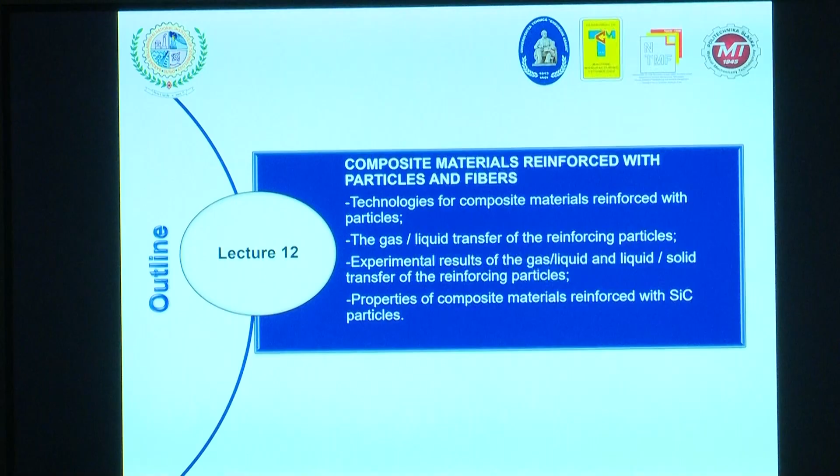Reinforced with particle and fibers. I put also fibers over there to compare some properties, but the experimental results that I will present will be focused only on particles. So we'll see some

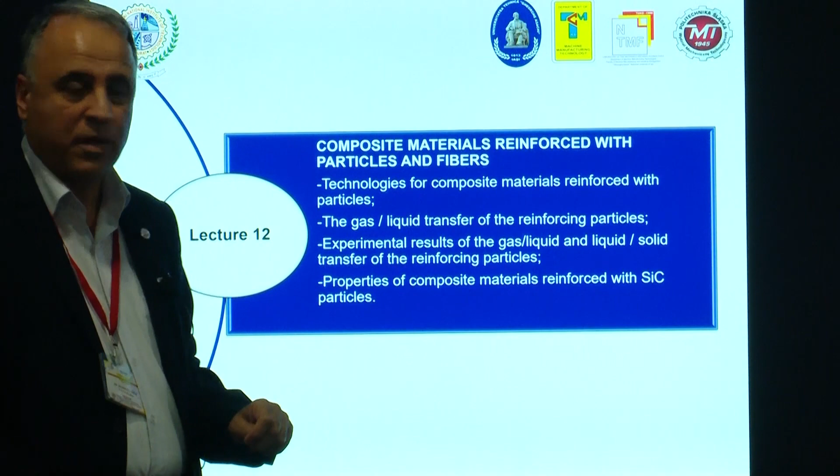technologies for composite material reinforced with particle, some theory concerning the gas to liquid transfer of the reinforcing particle, experimental results concerning the gas to liquid and liquid to solid transfer of the reinforcing particle, and property of the composite material reinforced with silicon carbide particles.

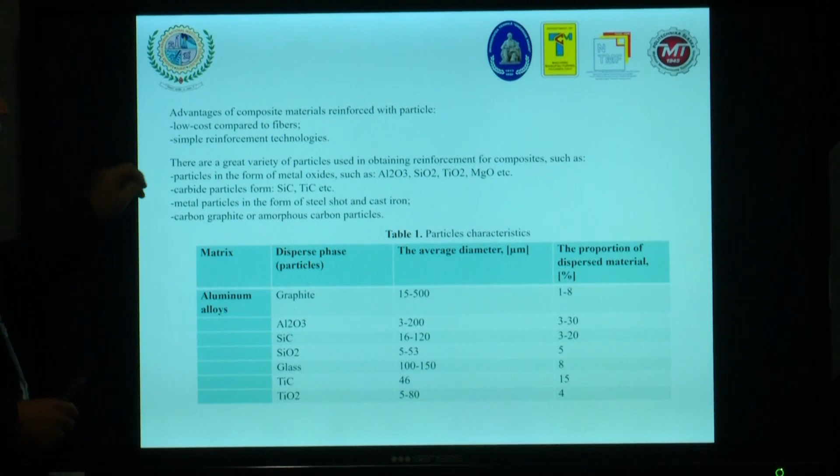So let's see a little bit only two advantages of composite material reinforced with particles: low cost compared with fibers, and simple reinforcement technologies. Kalpak asked me 2 days ago if there is a possibility, when I talk about some particles inside of the polymeric, to mix the particles.

You will see later that we got together - doesn't matter if I'm the first author - a patent in Romania for this type of equipment, in order to mix the particle inside. But the base method, as you already know, is the vortex method.

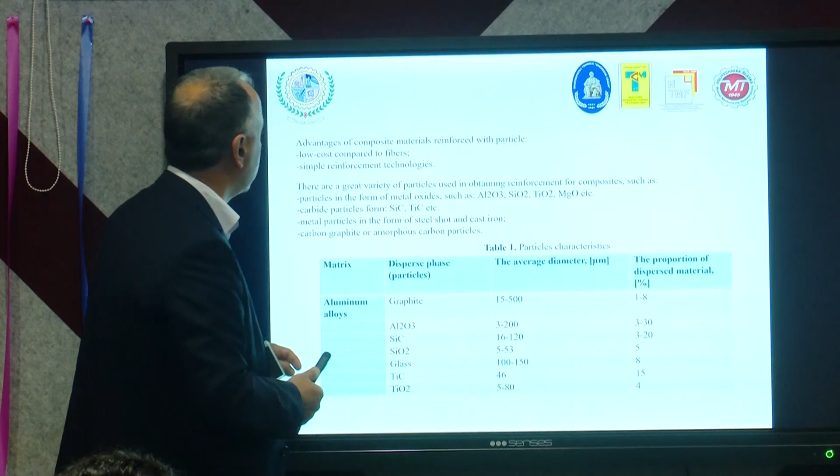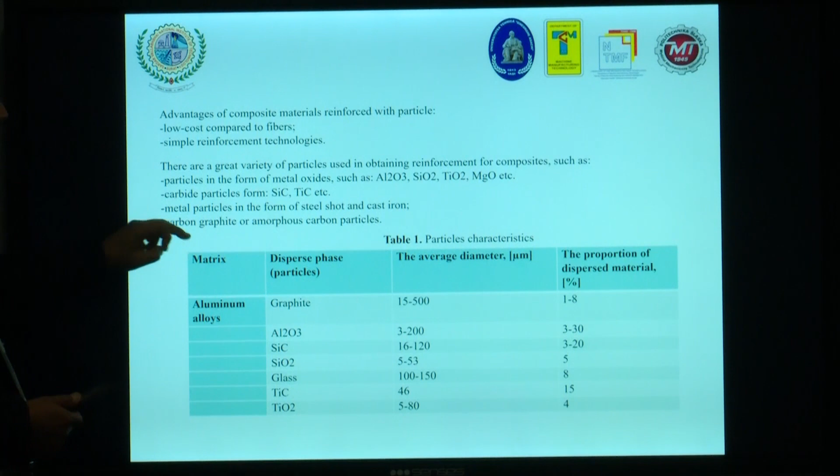So there is a great variety of particles used in obtaining the reinforcement of composite, such as particle in form of metal oxide. You can see aluminum oxide, silicon oxide, titanium oxide, magnesium oxide, and so on. Carbide particles from silicon carbide, titanium carbide, metal particles in form of steel shot and cast iron, carbon graphite or amorphous carbon particles.

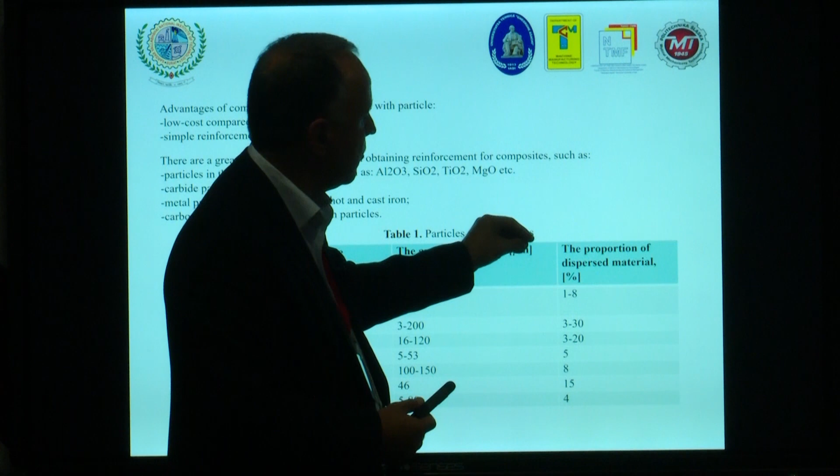I put over there, in case of aluminum alloys as matrix used, which are the particles, which are the average diameters, and which is the proportion of the dispersed material - how many percent of the material is dispersed.

So you can see the highest on graphite, but take into account the proportion of dispersed material, around aluminum oxide - one of the most used particles for reinforcement.

A little bit of comment: in case of particle reinforced composite material, the mechanical property change is less than in case of fiber reinforcement. We already know this, it was mentioned many times during this week. So the mechanical properties will decrease. These materials have significantly improved tribological properties, resistance to wear and shock amortization increases.

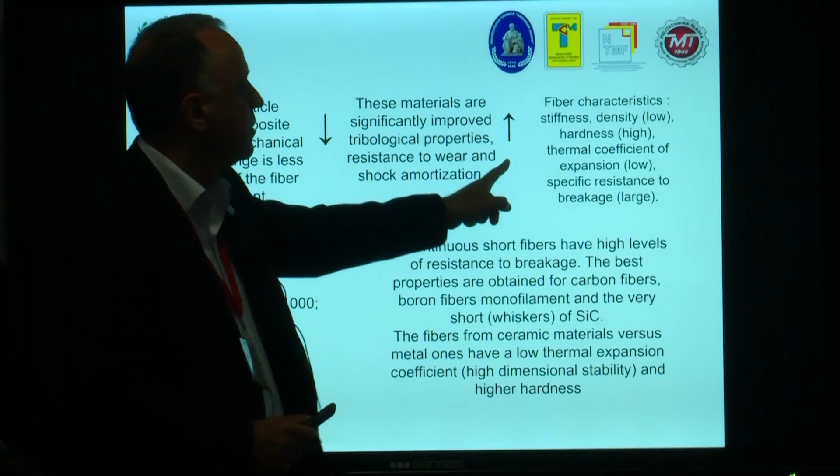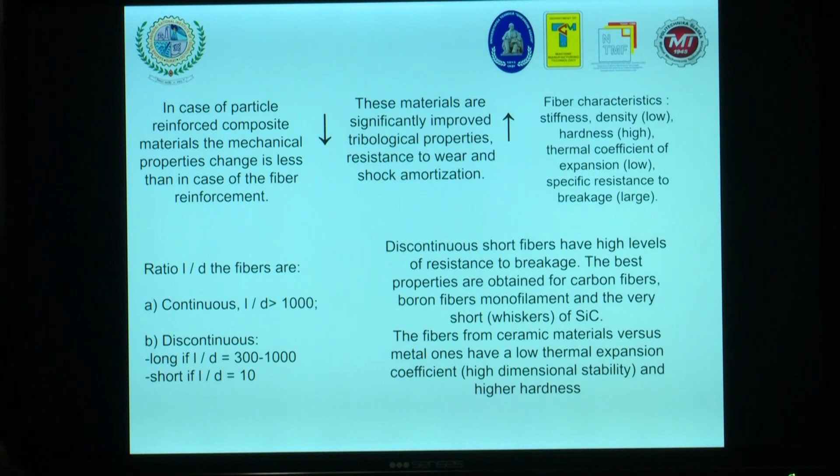Concerning the fiber characteristics, we can talk about the stiffness, density, hardness, thermal coefficient of expansion, specific resistance to breakage, and so on. The fiber has the main role in order to make a general classification - I mean the ratio between the length and diameter.

If this ratio is bigger than 1000, we can call it continuous fiber. In case that the ratio is between 300 and 1000, we can call it long discontinuous fiber. And if the ratio between length and diameter is 10, we can call it short discontinuous fiber.

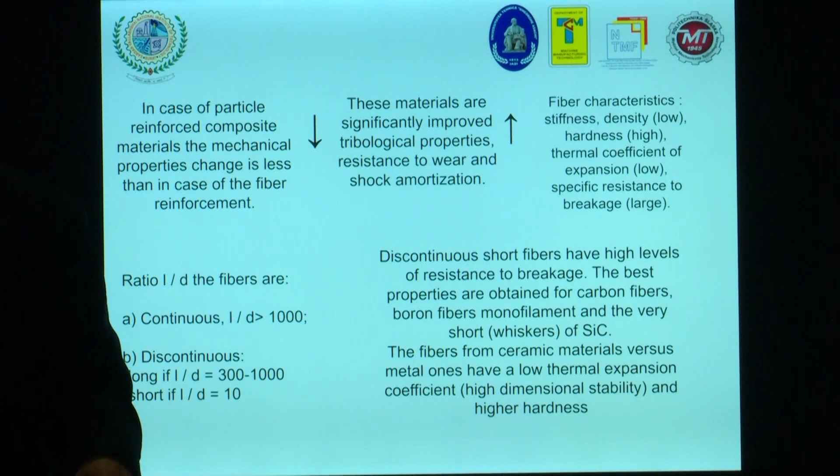Discontinuous short fiber have high levels of resistance to breakage. The best properties are obtained for carbon fibers - many times during the lectures this week we talked about carbon fibers - boron fibers, monofilament, and the very short whiskers of silicon carbide.

Fibers from ceramic material versus metal ones have a low thermal expansion coefficient, meaning high dimensional stability, and higher hardness - but of course, because we are talking about ceramic.

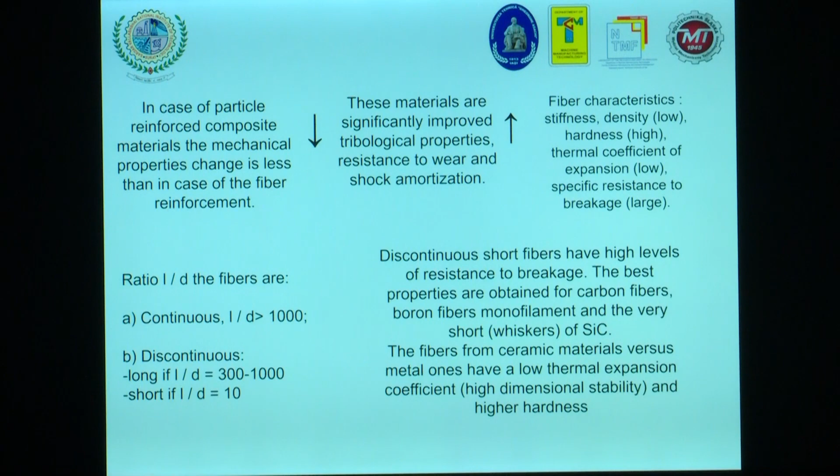So why do we use fiber reinforcement with a thin diameter? As the diameter decreases, the inherent flaws in the material also decrease and the strength increases, for better load transfer from matrix to fiber - because as you remember at the very beginning, when I mentioned which are the main goals of the matrix and which are the main goals of the fiber.

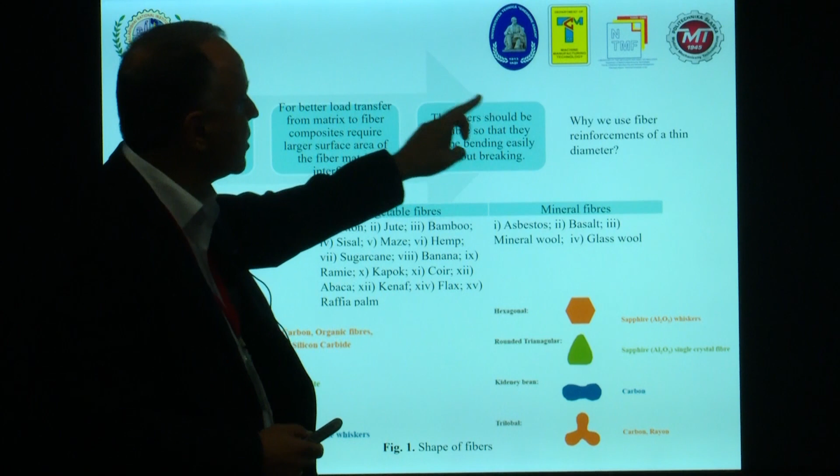The composite requires larger surface area of the fiber matrix interface. The fibers should be flexible so that they can be bent easily without breaking. Okay, that's how we got a little bit of an answer about the questions.

I put also here some shapes of the fibers - circular one, we can call glass, carbon, organic fibers, alumina, silicon carbide; elliptical shape, alumina, mullite; triangular shape, silicon carbide whiskers; and of course hexagonal one, rounded triangular one, kidney bean in case of carbon, and trilobal shape in case of carbon and rayon.

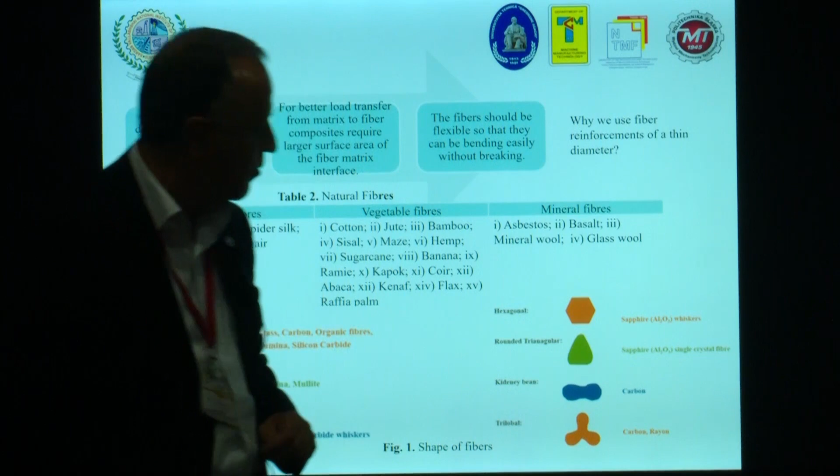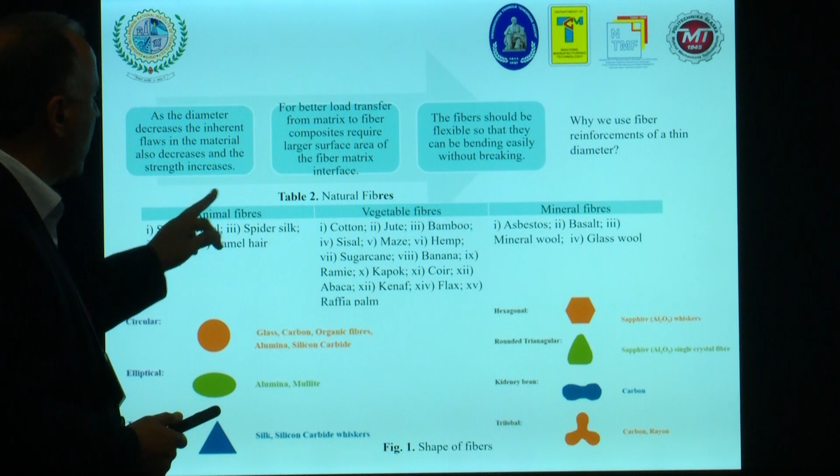So these are the main shapes of the particles that we can use inside of composite material as reinforcement. Also, if you want to make an idea about the natural fibers, because some of your colleagues are involved in natural fibers, we can split them into animal fibers, vegetable fibers, and mineral fibers.

I put here some examples: silk, wool, spider silk, sinew, camel hair. Another vegetal fiber: cotton, jute, bamboo, and so on. Hemp, banana, and another one. Which is the natural fiber that you are working with?

So the mineral fibers: asbestos, basalt, mineral wool, glass wool, and so on. I think we can carry on with other examples of the first, second, and third types of natural fibers.

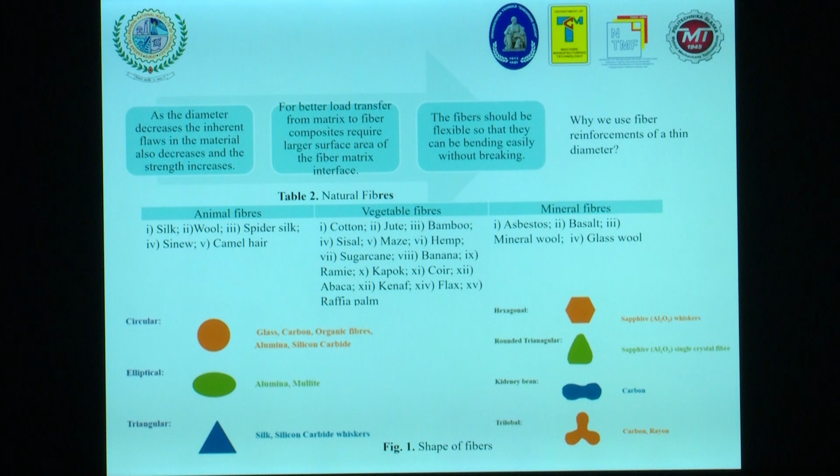Let's see a little bit comments about glass and quartz fibers. They are produced by extruding molten glass at 1200 Celsius, passed through spinnerets of 1 up to 2 millimeters in diameter, then drawing the filaments to produce fiber of diameter between 1 up to 5 micrometers. An individual filament is small in diameter, isotropic in behavior, and very flexible.

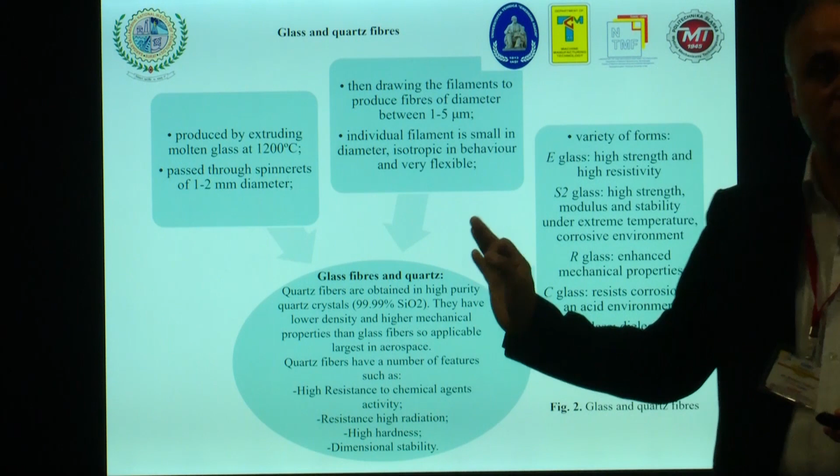You can see here the main types of glass fiber: E-glass, with high strength and high resistivity; S-glass, high strength, modulus, and stability under extreme temperature corrosive environment; R-glass, enhanced mechanical properties; C-glass, resists corrosion in an acid environment; and D-glass with dielectric properties.

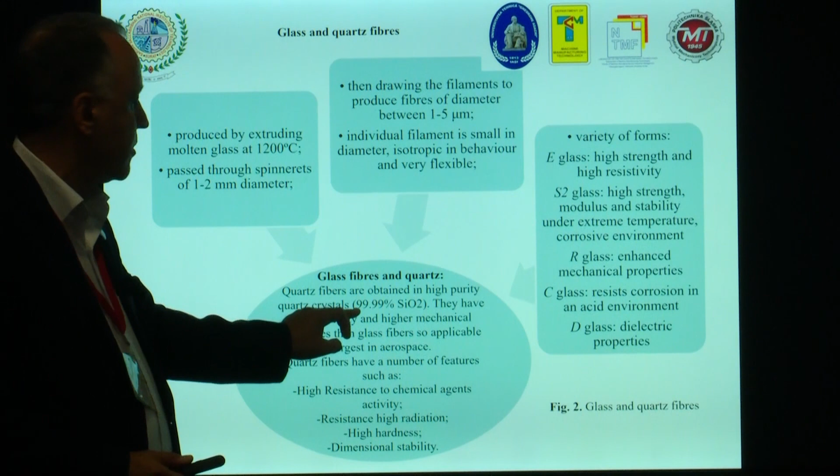The glass fiber and quartz fiber are obtained from high purity quartz crystals, 99.99%. They have lower density and higher mechanical property than glass fiber, which makes them more suitable for large industries such as the aerospace industry. Quartz fibers have a number of features such as high resistance to chemical agent activity, resistance to high radiation, high hardness, and dimensional stability. This is only a general sketch about the glass and quartz fibers.

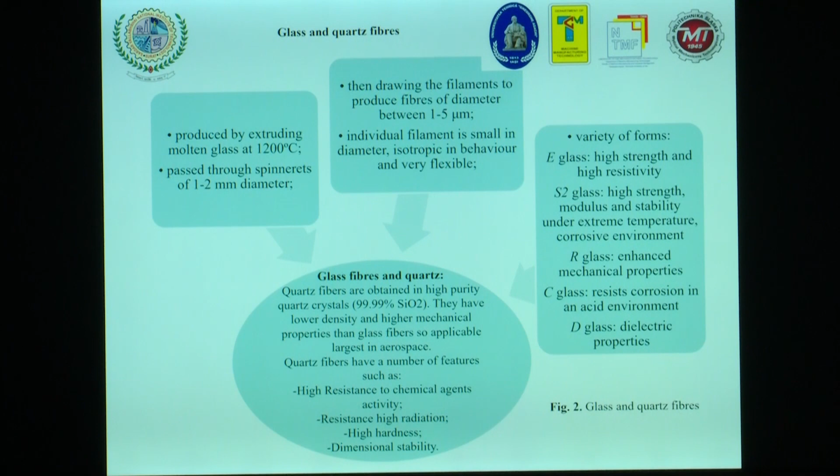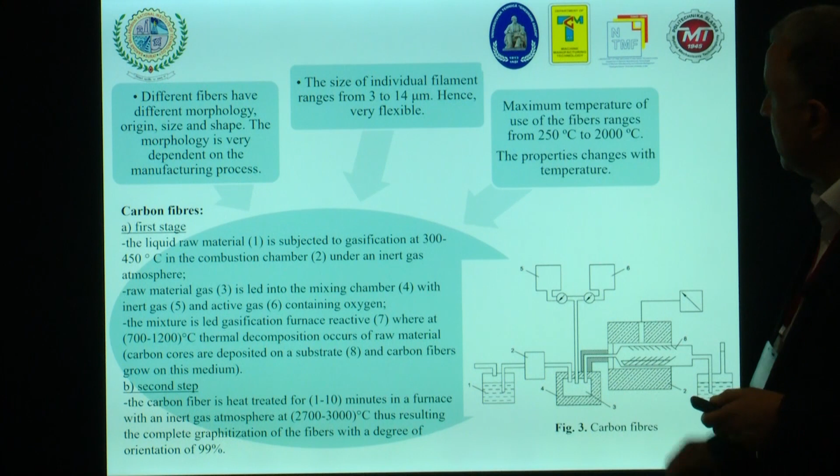Carbon fibers. Different fibers have different morphology, origin, size, and shape. Normally, the morphology is very dependent on the manufacturing process we choose. The size of individual filament ranges between 3 up to 14 micrometers, hence very flexible. The maximal temperature of use of the fibers ranges between 250 up to 2000 Celsius. The properties change, of course, with the range of temperature.

I put here some information about the carbon fibers, about the equipment that allows us to obtain them. Please take into account that we need two stages, first and second step. In the first stage, the liquid raw material, number 1, is subjected to gasification between 300 and 450 in the combustion chamber number 2, under an inert gas atmosphere.

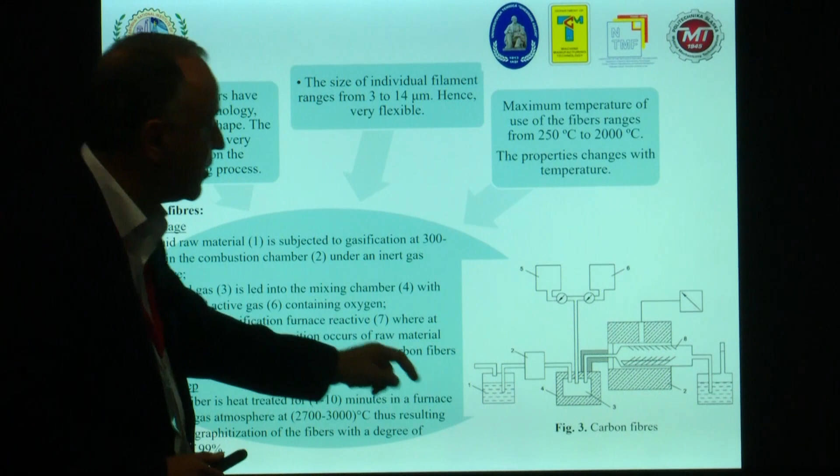Afterwards, the raw material gas, number 3, from this one is led into the mixing chamber number 4 with the inert gas from enclosure number 5 and the active gas from enclosure number 6. The mixture is then led to the gasification furnace reactor, number 7, where at a temperature around 700 to 1200, thermal decomposition of the raw material occurs. The carbon cores are deposited on the substrate, number 8.

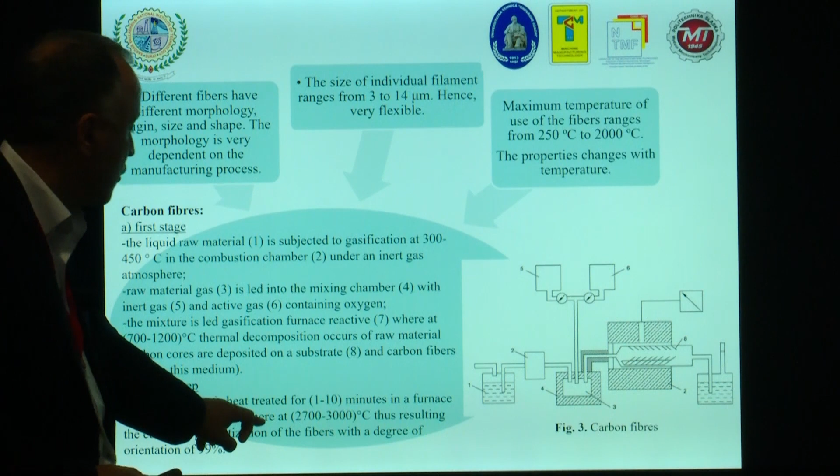In the second step, the carbon fiber is heated between 1 up to 10 minutes in a furnace with an inert gas atmosphere, at a temperature of 2700 to 3000, resulting in complete graphitization of the fiber with a degree of orientation around 99%. So this is a general sketch of how we can get the carbon fibers.

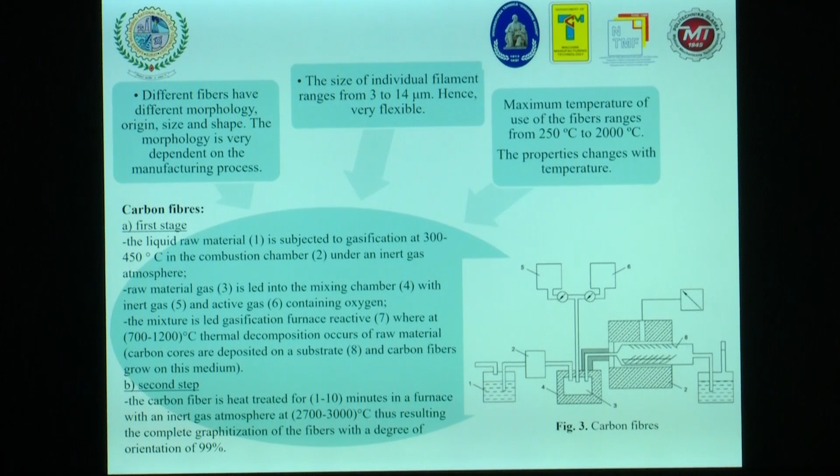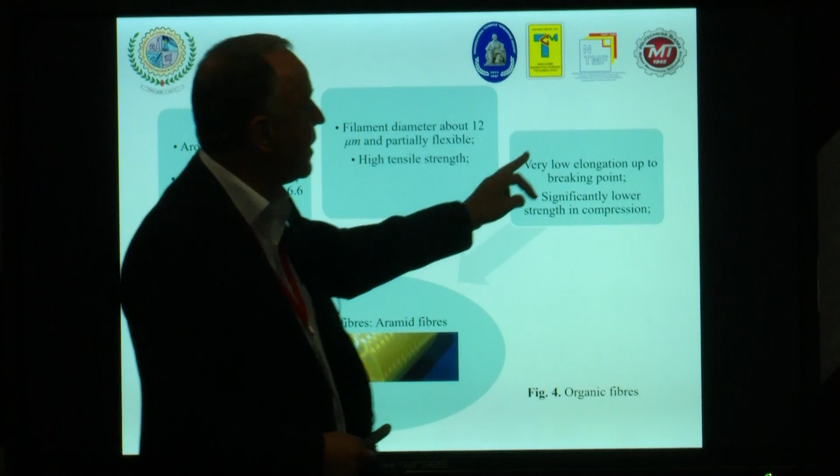Of course, if you try to find on the internet, you can find the details of all the technology, including the technological parameters. And is the raw material petrochemical? The raw material for carbon fiber could be organic fibers, aromatic polyamide family of nylons: polyamide 6 (nylon 6), polyamide 6.6 (nylon 6.6). The diameter of the filament is about 12 micrometers, partially flexible, but with high tensile strength, very low elongation up to the breaking point, and significantly lower strength in compression.

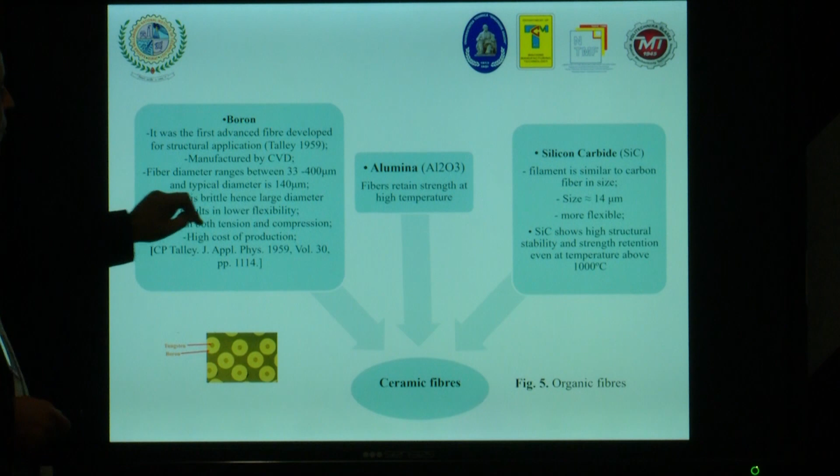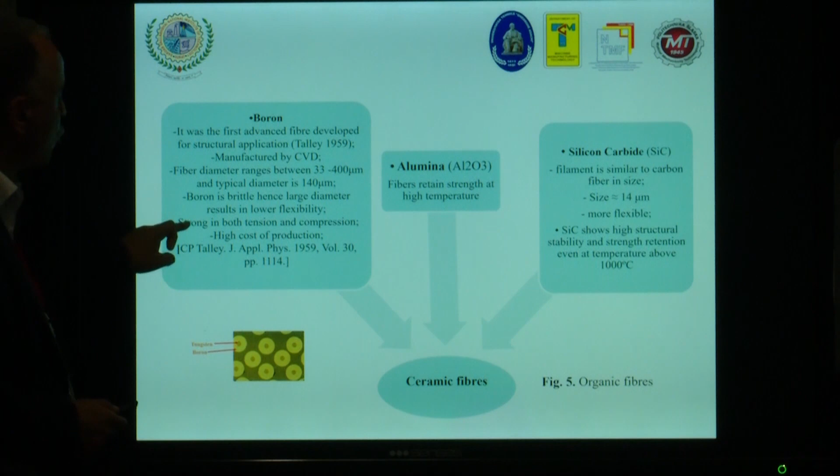Boron, ceramic fibers. Boron was the first advanced fiber developed for structural application, back in 1959, so many years ago. It's manufactured by CVD, chemical vapor deposition, as we already presented. Fiber diameter ranges between 33 and 400 micrometers, and the typical diameter is around 140 micrometers. Boron is brittle, hence the large diameter results in lower flexibility. It is strong in both tension and compression, but has a high cost of production.

Alumina fibers retain strength at high temperature. Silicon carbide filament is similar to the carbon fiber in size, around 14 micrometers, and is more flexible. Silicon carbide shows high structural stability and strength retention even at temperatures above 1000 Celsius.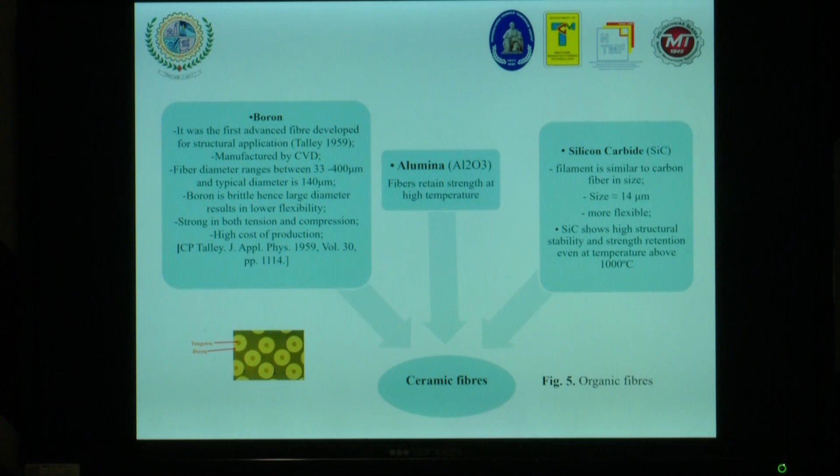The vortex method was already discussed as the most used method for preparation of suspension alloy particles. The primary processes used on an industrial scale to obtain metal matrix composites can be classified into two groups: solid state, casting infiltration, and in situ processing.

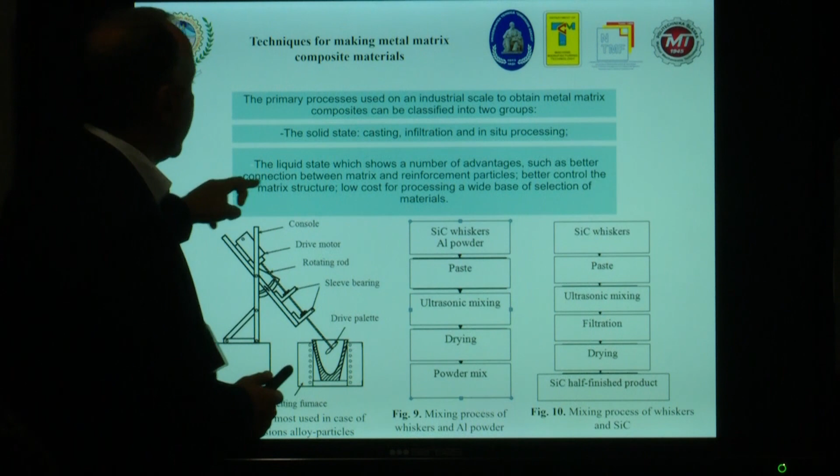There are, of course, several advantages: better connection between matrix and reinforcement particle, better control of the matrix structure, low cost of processing, and a wide base of material selection.

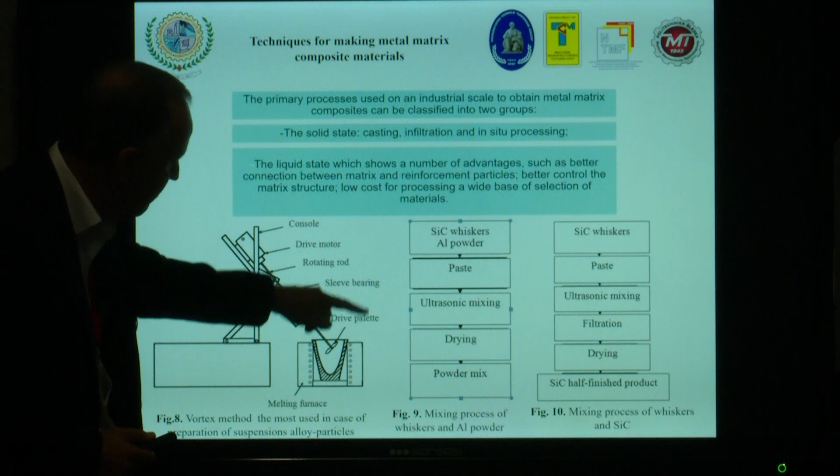You can see in figure 8 the vortex method, and the elements are quite clear. We need inside the melting furnace a palette in order to mix the particles well. We also need a drive motor fixed on the console, a rotating rod, sleeve bearing, and so on.

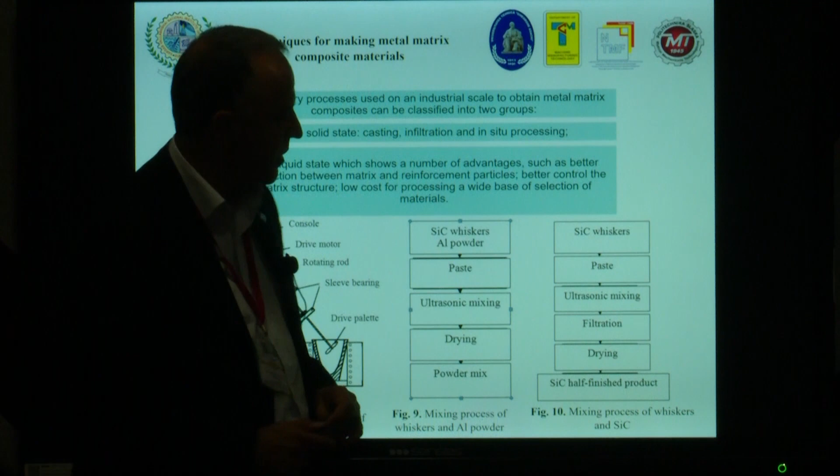If we go further to the mixing process of whiskers and aluminum powder, you can see some steps here. And the mixing process of whiskers and silicon carbide, you can see also some steps here - general steps without further comments for each one.

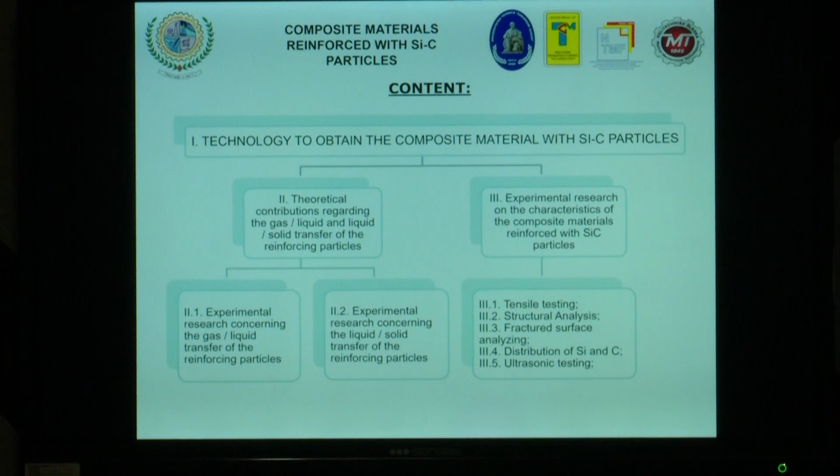Now let's go a little bit into the composite material reinforced with silicon carbide particles. Actually, this is our research - I will show you the paper if you want to read all the results. It was published in the Acta Physica Polonica journal, an ISI journal.

Let's see the outline of the technology to obtain the composite material with silicon carbide particles. First, theoretical contribution regarding the gas to liquid and liquid to solid transfer of the reinforcing particle. Then, experimental research of the characteristics of the composite material reinforced with silicon carbide particles.

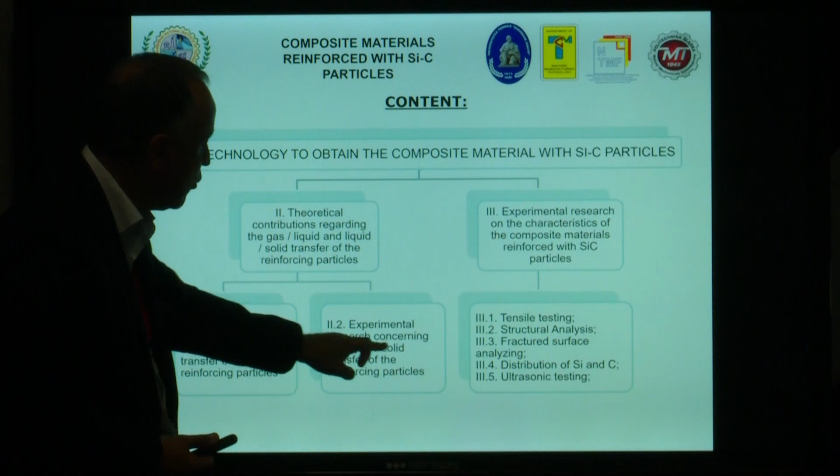Experimental research concerning the gas to liquid transfer of the reinforcing particle, and the same for liquid to solid transfer. Also some experimental research concerning tensile strength, structural analysis, fracture surface analysis, distribution of silicon and carbon, and ultrasonic testing.

That's all that we did concerning the experimental research. Actually, this was our research direction on a national project, I think 6-7 years ago.

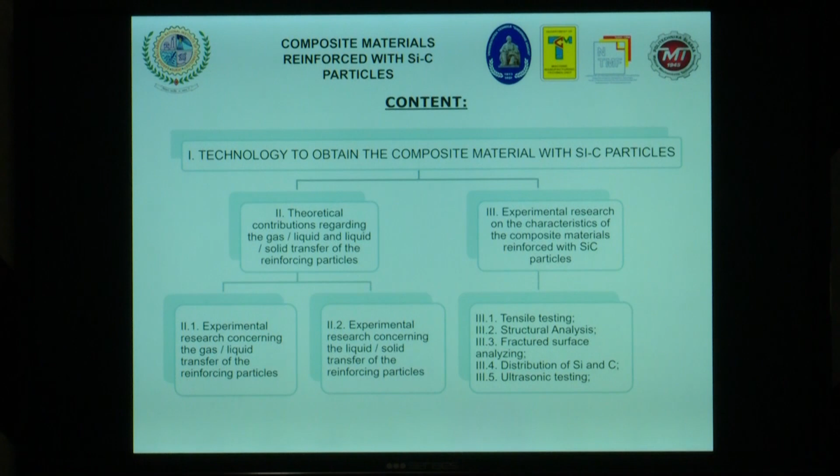The advantages are better homogenization and fast cooling. From our point of view, this is the main advantage of our equipment.

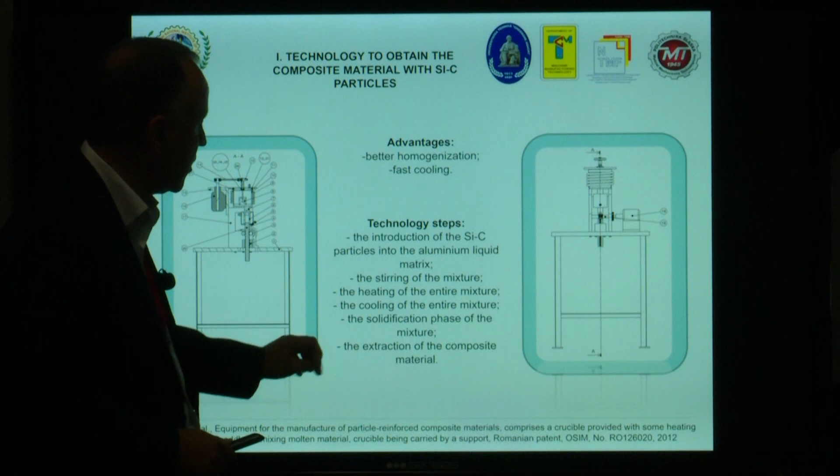The technology steps are as follows: introduction of the silicon carbide particles into the aluminum liquid matrix, stirring of the mixture, heating of the entire mixture, cooling of the entire mixture, solidification phase of the mixture, and finally extraction of the composite material.

So if you visit our university, our department, you will see that we have this equipment in my lab. It is working, and you can do some experimental research with it.

Now a little bit of theoretical contribution regarding the gas to liquid transfer of the reinforcing particles. We realized a new model starting from certain assumptions, because it was not possible to build a new model without some assumptions from this point of view.

The assumptions were as follows: during all stages of sinking, the thermodynamic equilibrium of the surface at the phase junction is applied. Second, the specific interfacial energy is isotropic. The gas to liquid metal interface is plain and free of oxides.

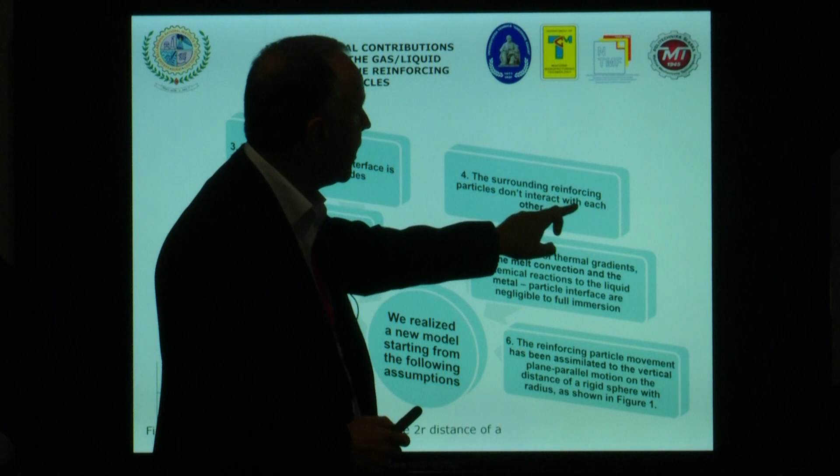The surrounding reinforcing particles do not interact with each other. The effects of the thermal gradient, melt convection, and chemical reaction at the liquid metal to particle interface are negligible up to full immersion.

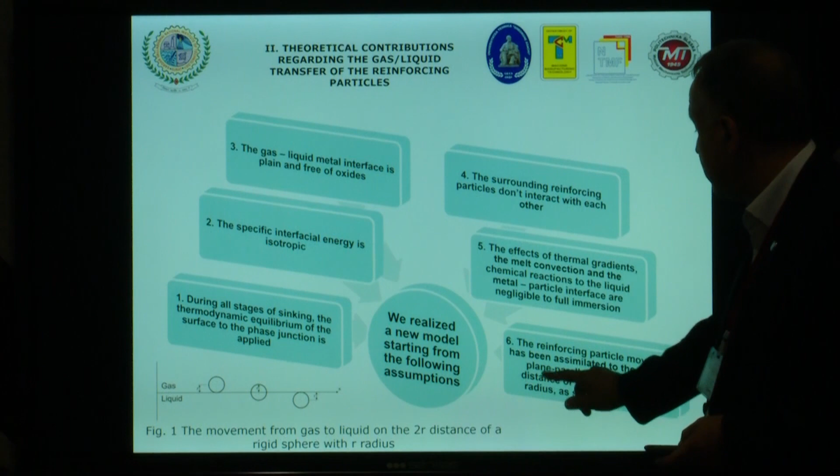And the last assumption: the reinforcing particle movement has been assimilated to the vertical plane. Please see figure number 1, showing the distance of a rigid sphere with radius R, where R is the radius of the particle. These are the six assumptions that we needed before starting to create the model.

Against one rigid sphere will act the following forces: the force due to its weight, the buoyancy force, and the force due to their interphase tension.

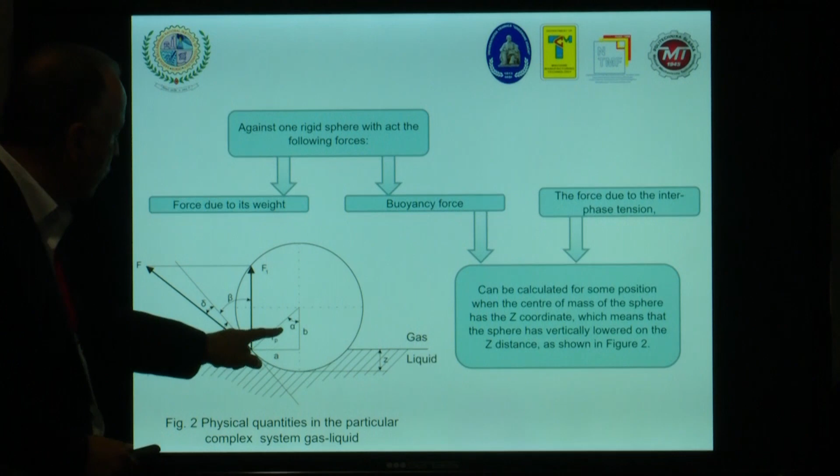Altogether, the buoyancy force and the force due to interface tension can be calculated for some position where the center of mass of the sphere has the z coordinate, meaning the sphere has vertically lowered by the z distance as shown in this figure. From this figure, keep in mind that the radius is rp. We also use the critical speed, which you will see later.

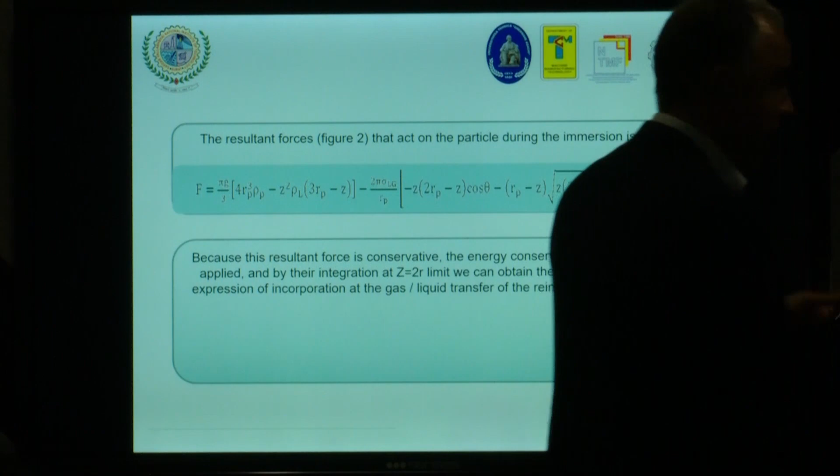And the resultant forces, after we did all the calculus and so on, the resultant forces that act on the particle during immersion is the relation that we got. It's a lot of calculus to obtain this relation.

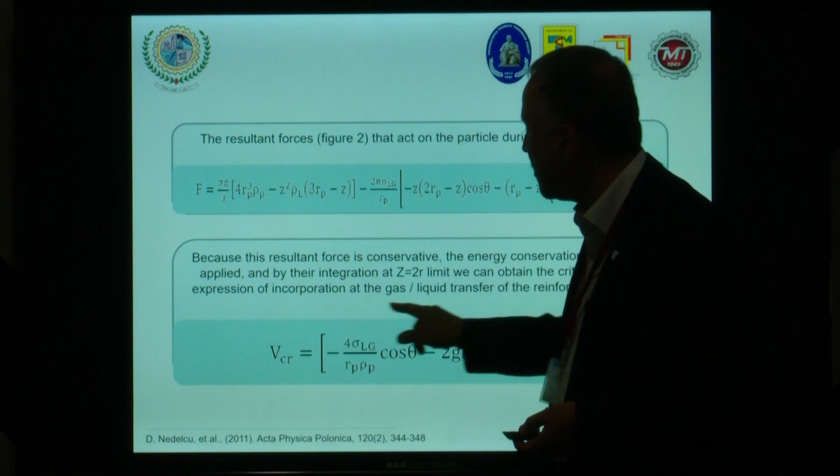Because this resultant force is conservative, the energy conservation law can be applied. By integration at z equal to diameter, I mean double radius as limit, we can obtain the critical velocity expression incorporating the gas to liquid transfer of the reinforcement particle. We put the main idea on the critical speed of the transfer from gas to liquid, and from liquid to solid. You can see also the relation for critical speed that we got.

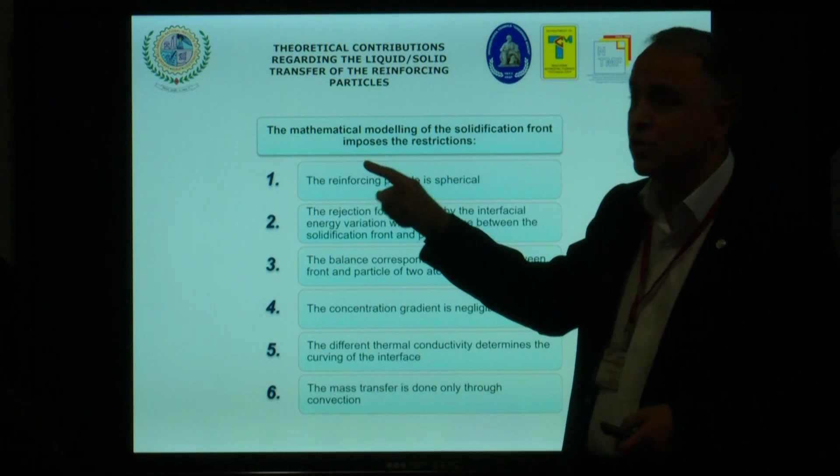Theoretical contribution regarding the liquid to solid transfer of the reinforcement particle. So the mathematical modeling of the solidification front imposes the following restriction: the reinforcing particle is spherical, as we talked about 2 days ago. There are many shapes of the particle, but it's not possible to take them into account exactly, so we have to make the approximation as spherical.

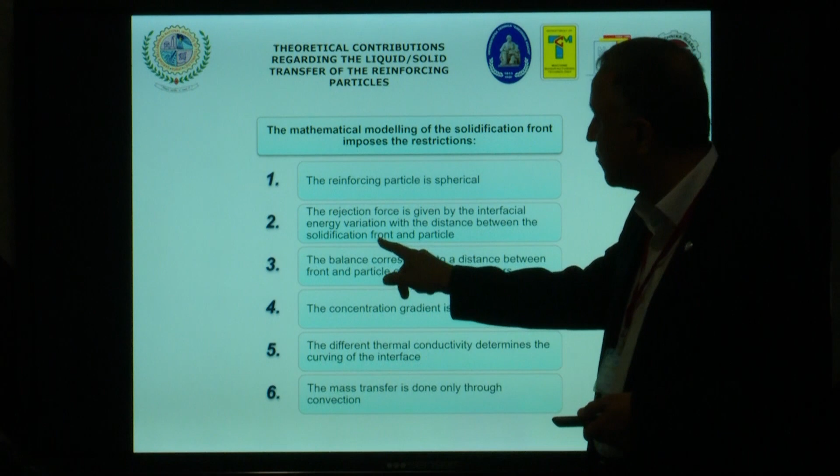The next restriction: the rejection force is given by the interfacial energy variation with the distance between the solidification front and particle. The third one, the balance corresponds to a distance between front and particle of 2 atomic diameters. The concentration gradient is negligible. The different thermal conductivity determines the curving of the interface. And the last restriction, the mass transfer is done only through convection.

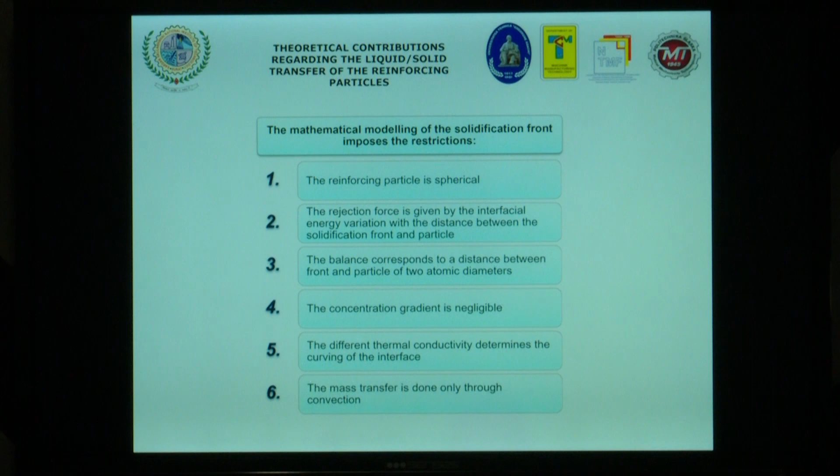You can see that the force that acts against a spherical particle is missing the radius here. So the force that acts against a spherical particle, with RP meaning radius, and the density, that moves with the critical speed VCR in the solidification front influence area, you can see as shown in figure number 3.

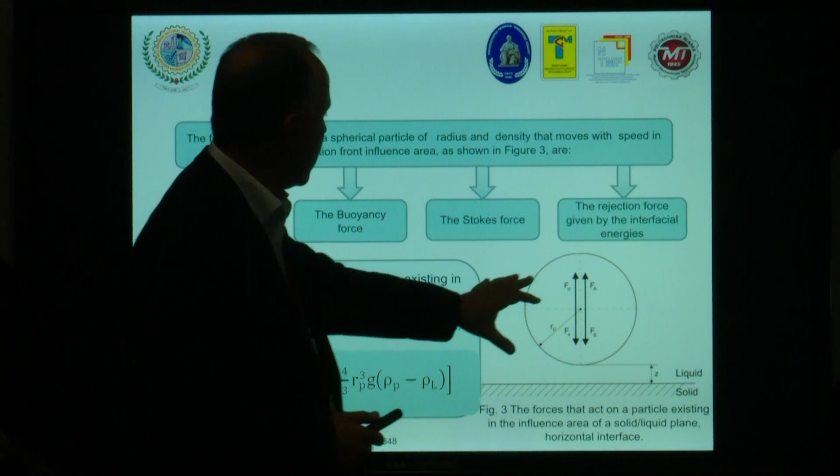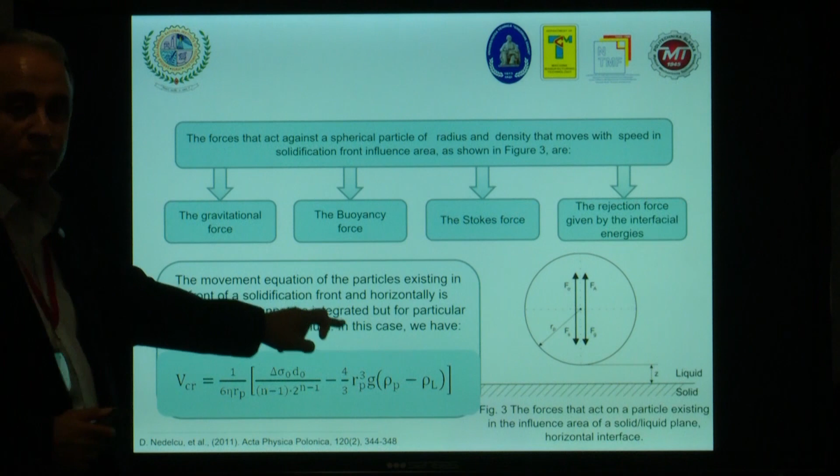So the forces are: the gravitational force, the buoyancy force, the Stokes force, and the rejection force given by the interfacial energy. We also got the movement equation for the critical speed of the solidification front, which horizontally is non-linear and cannot be integrated, but for the particular case we can do it at the equilibrium stage. In this case, we got the relation for the critical speed.

Now a little bit of information about the experimental results concerning the gas to liquid and liquid to solid transfer of the reinforcing particle. We used 3 types of alloys. The chemical composition includes magnesium, copper, silicon, manganese, aluminum, and the rest.

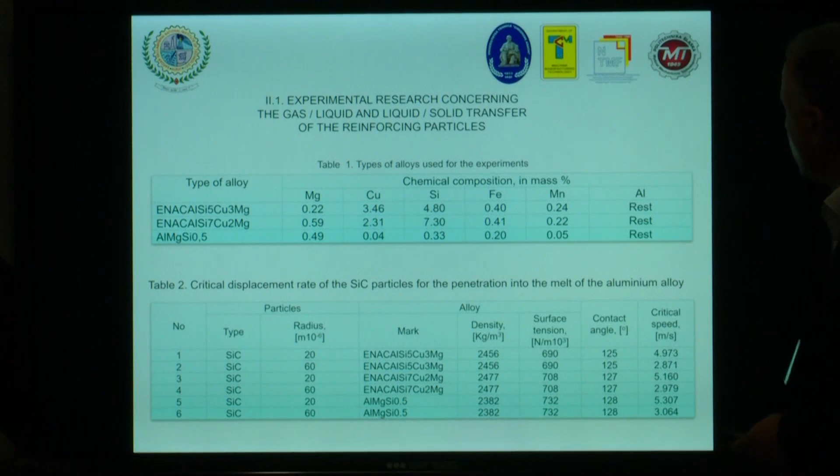Another one, the critical displacement rate of the silicon carbide particles for the penetration into the melt of the aluminum alloy. You can see all the information, including the density, surface, contact angle, and the critical speed. So we made all the calculations for the critical speed, taking into account the relation that we already presented. You can also see the radius, 2 levels, 20 and 60, for the particles.

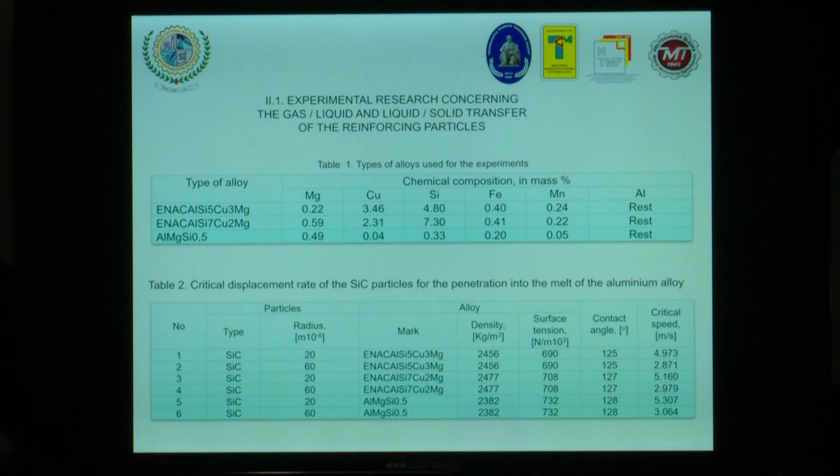The first results are based on the variation of the critical speed of silicon carbide particles. You can see here two diagrams: critical speed and radius, and the values in each case. This is the result for the first alloy that we used, with 2 values for the particle radius. This is the result for the second alloy, and this is the variation between critical speed and radius for the third alloy that we used.

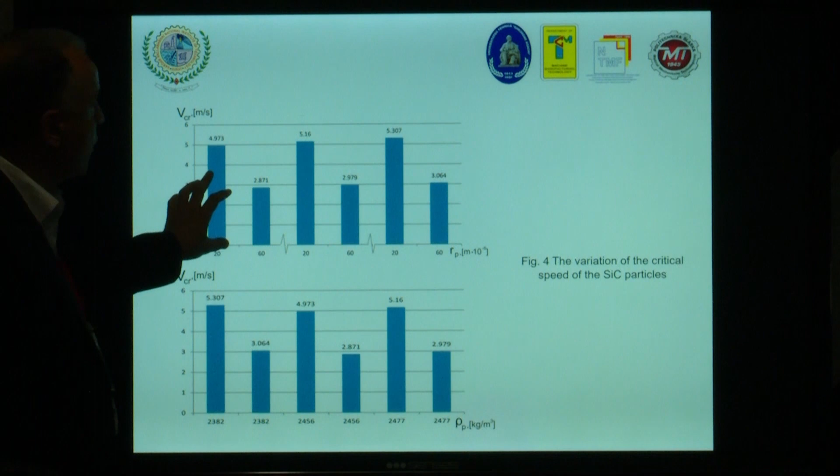So you can see that the biggest critical speed, meaning the speed for transfer from gas to liquid, is in the case of the third alloy we used. We can go further to make the variation between critical speed and density: first metal used, second alloy used, third metal alloy used. Here it's a little bit different. Here is the highest one, the third one is in the second position, and here the last position in terms of values for critical speed.

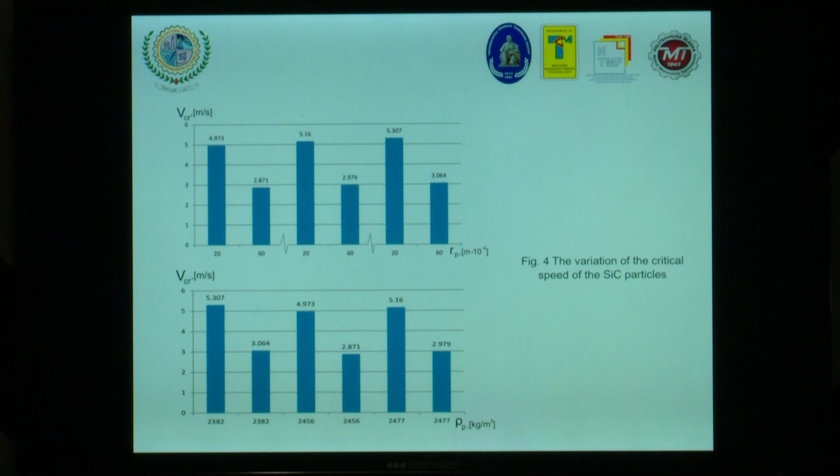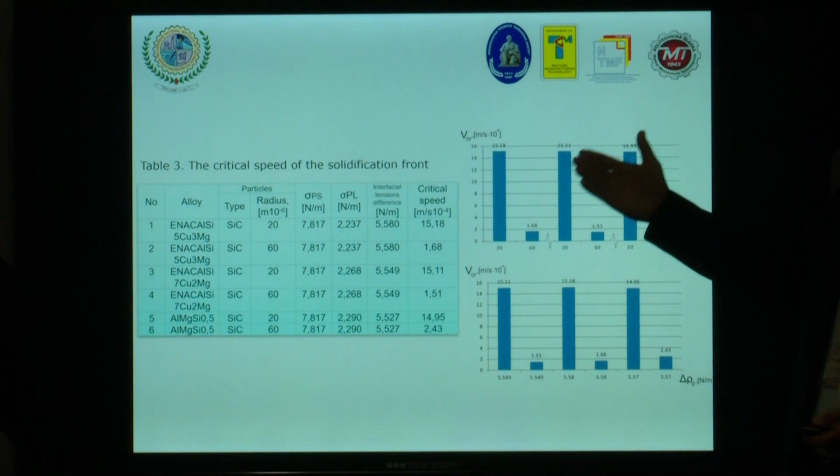Now the critical speed of the solidification front. I put here the information, also taking into account the critical speed values calculated from liquid to solid, because now we are talking about the solidification front. You can also see the type of particle, radius, interfacial tension difference, and look here about the variation, what happens with the smallest radius versus the highest radius of the particle. So we can talk about the highest speed only in case of the small radius of the particle used.

Going further, also the variation of critical speed as a function of density. You can see that the highest is in the case where the densities are, let's say, more or less the same, in the case of the first alloy that we used.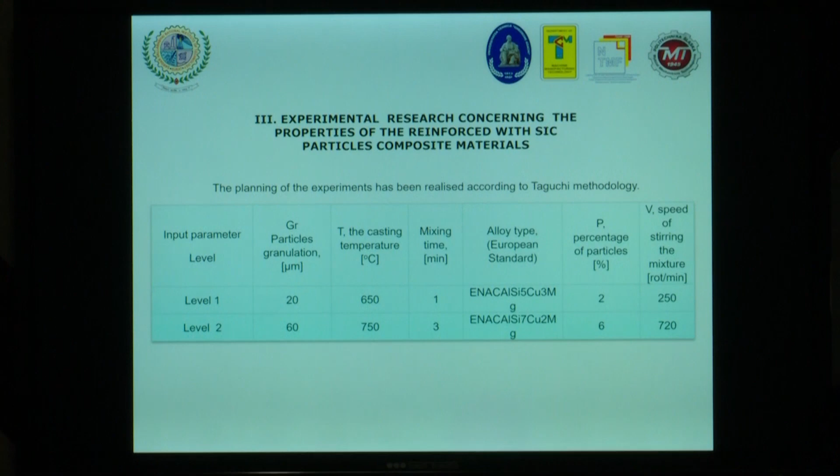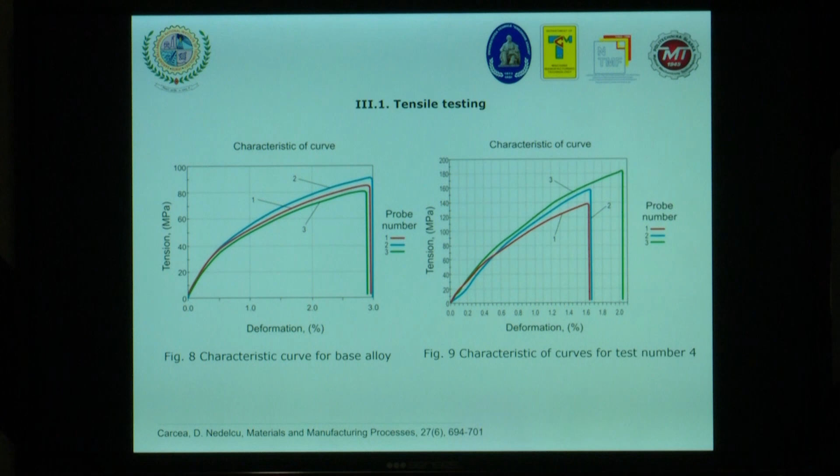A little bit of results about the tensile strength. You can see the characteristic curve for the base alloy, around 90 megapascals. If you go further, in case of test number 4, you can see it's more than 180 megapascals. So more or less, it's double as a value.

Structural analysis of the matrix alloy, first and second alloy, and some microphotos obtained for the composite, also first and second alloy. We've reinforced with particles of 20 micrometers radius and 60 micrometers radius.

The main conclusion for the bigger particles, 60 micrometers, is that some causes of fragmentation during the process are likely to be seen - namely the relatively high temperature and strong shaking of the mixture of alloy reinforced with silicon carbide particles.

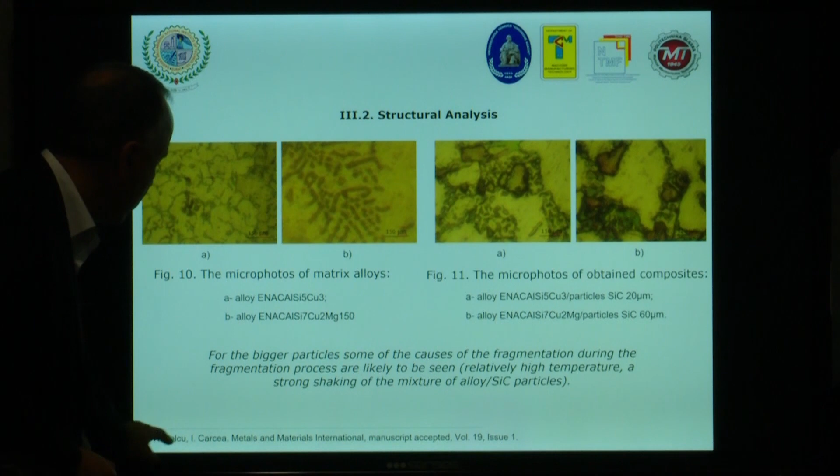You can see also our paper that was published in Metals and Materials International, where you will find all the results and all the details.

One small query: when compared to the base alloy, where you have things dispersed, you can see that all the silicon carbide and rest of the particles are agglomerated only at the grain boundaries, rather than within the grains. Any particular reason for that? I ask because this is a cast aluminum product.

Do you do a stirring process during solidification? Here I have many microphotos of the results. It's about the mixing process inside the enclosure. I don't want to say our equipment gives 100% of the best result concerning the mixture of the particles - there could be, from time to time, some agglomeration.

Maybe I put a wrong image. No, dendritic structure - dendritic structure also we can see. It's a very good structure, 10B for the first one, a very good structure indeed.

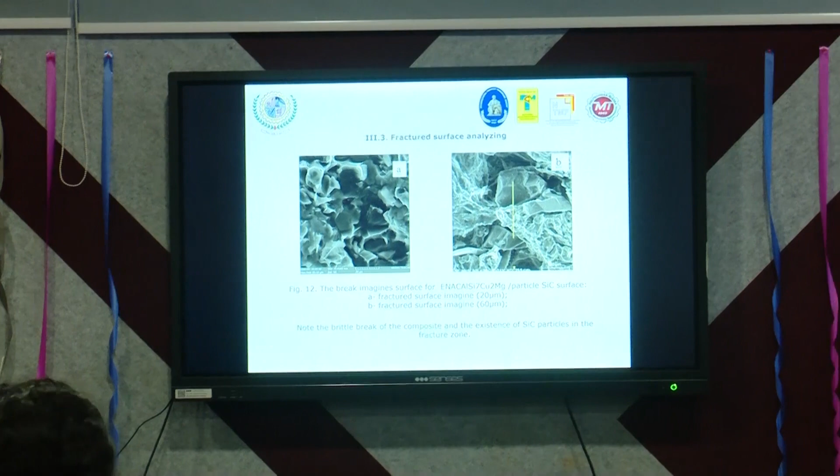The break images from the fracture surface with particle reinforcement. You can see, in case of 20 micrometers and 60 micrometers, a brittle break of the composite and the existence of silicon carbide particles in the fracture zone.

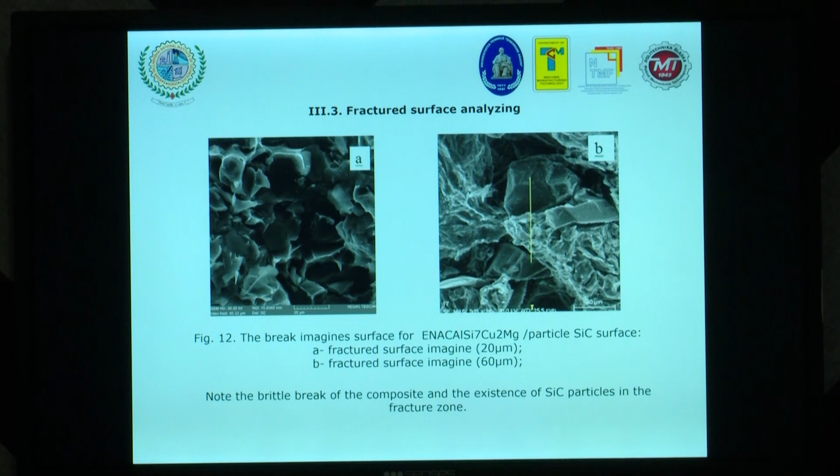I put only one, you can see the results, not many. And the distribution of silicon and carbon, you can see here.

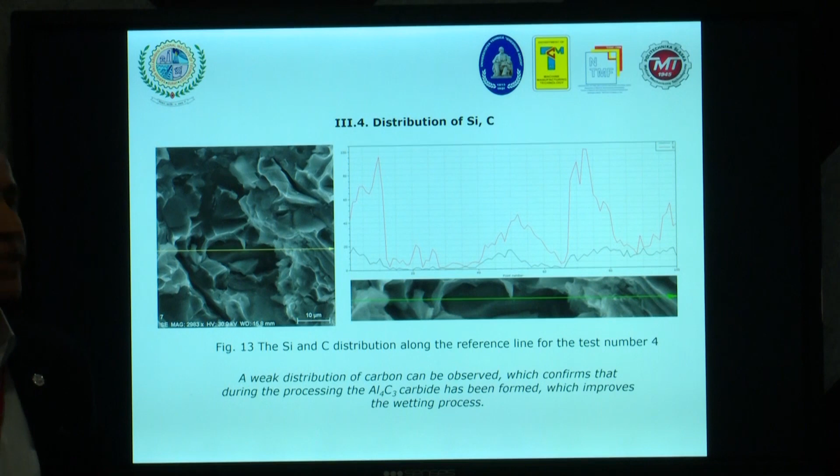Which is the distribution? The red one is silicon, the green one is carbon. So the weak distribution of the carbon can be observed, which confirms that during processing, aluminum carbide has been formed. This is quite important because it improves the wetting process - the wettability. This is, let's say, the main conclusion from this point of view.

And of course, ultrasonic testing. We made ultrasonic testing also for experiment number 4. Here could be observed the presence of some small, very slight discontinuities - maybe some porosities.

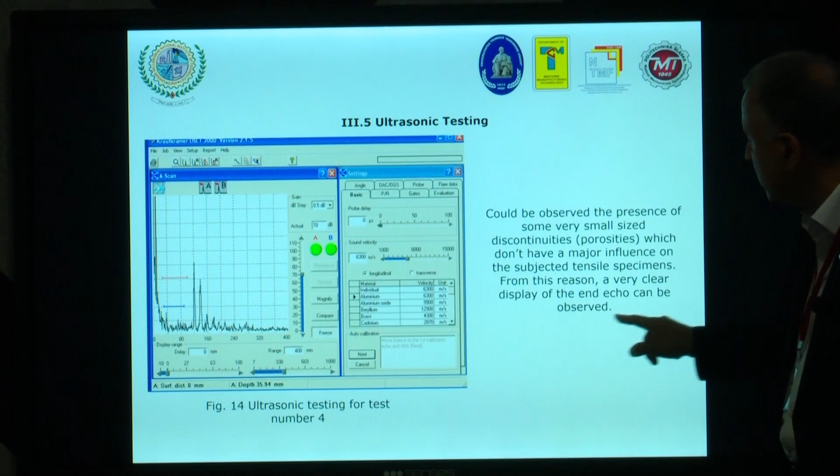These do not have a major influence on the tensile specimen, because a very clear display can be observed at the end. So this is the ultrasonic testing showing what happened with the whole structure, the whole thickness of the material. There are many, many results, but I put only a few.

One small query: in ultrasonic testing, we get the reflected sound - is that the third peak or second peak? The first peak, on the left, is the reference peak. Yes, that one is the reference one. That means the depth - the second one is the...

Maybe over there, for the second or third, there could be some bigger porosity and so on, so it was not possible to have a clear reading. If we see the first peak, and the second and third one diminishing - maybe it represents that it has gone down, or the back wall has come again and hit the surface, something like that.

It could be something, but we cannot tell it is porosity. Porosity means it would still be lower. We put over there some porosity, maybe, but it could be other reasons, of course.

Another thing I noticed is doing ultrasonic testing in aluminum is very tough, because you need a reference sample and you should make sure the wave passes through it perfectly. We had a reference sample, of course, but the quality makes it tough. It's not easy, not as easy as steel, because aluminum behaves differently.

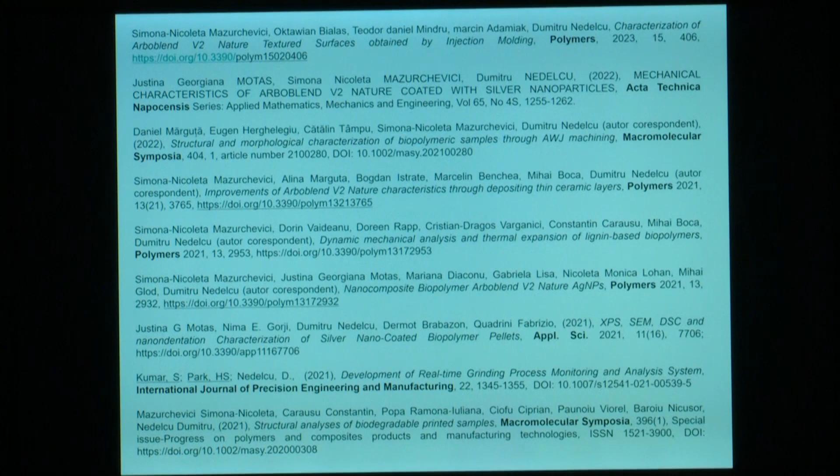And I put here some information about the papers, the results of the papers used during the lecture, published together with my colleagues in different journals. You can see Polymers, Acta Technica Napocensis, Macromolecular Symposia, again Polymers.

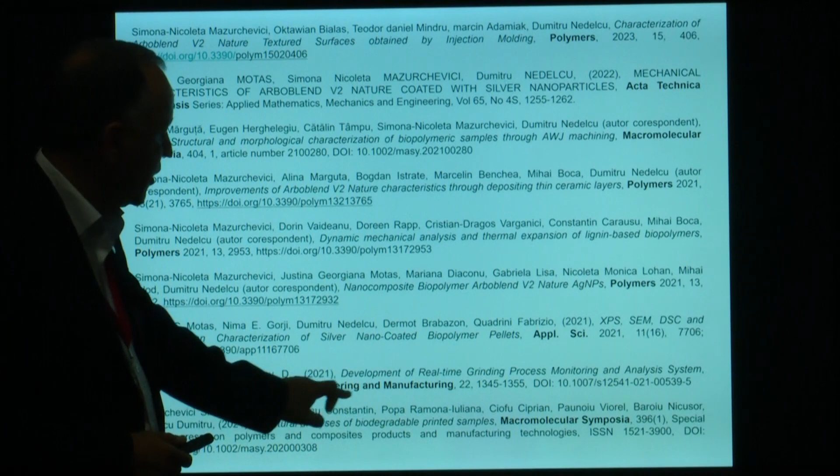You can also see Applied Science, International Journal of Precision Engineering and Manufacturing. There was very good collaboration here with Professor Park from South Korea. Another one in Macromolecular Symposia.

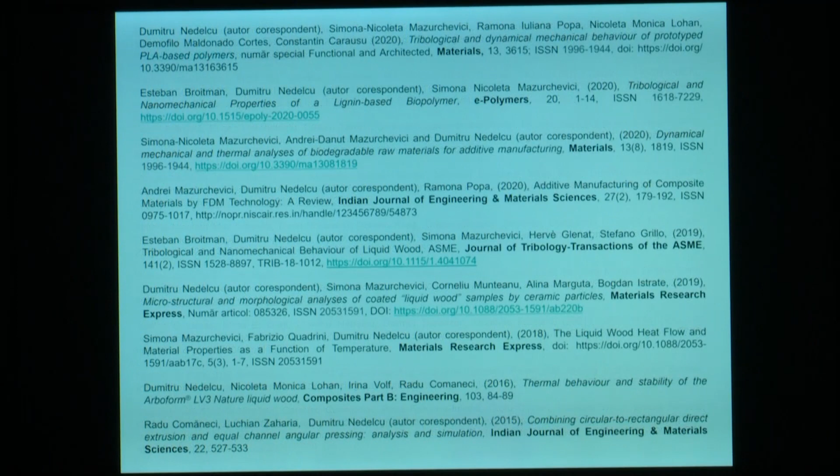Materials, good collaboration with Professor Esteban Broitman, we published in e-Polymers. Materials, Indian Journal of Engineering and Material Sciences.

Some papers, he attended our conference, I think once in Poland and once in Romania. He was very good editor-in-chief of this journal, and I'm one of the editors of this journal. Many years ago, he invited me to become editor.

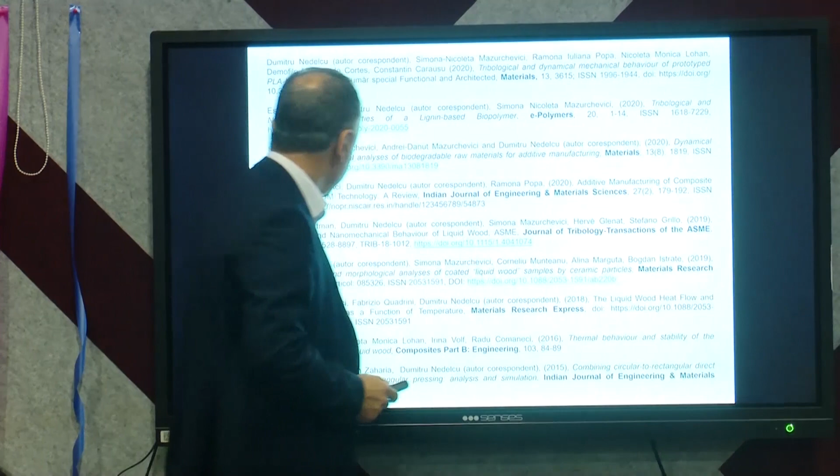Journal of Tribology Transactions of the ASME, Materials Research Express, very good journal in the UK. Composite Part B Engineering, you know that Composite Part B Engineering now is the highest journal, with more than 11 impact factor, I think, maybe bigger now.

Again, Indian Journal of Material Sciences, Materiale Plastice, it's one Romanian ISI journal. Now the journal has 0.8 impact factor, a good one, but the topic is tight, only on plastic materials, biodegradable materials. I will invite you to join and publish, because it's without APC.

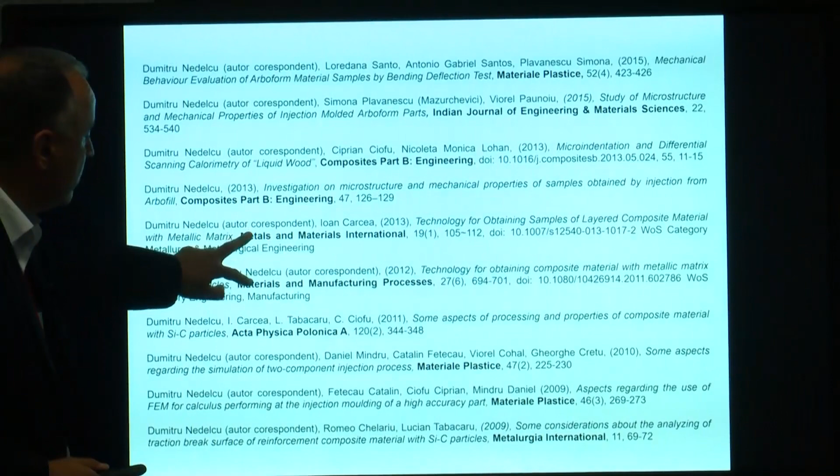So this is quite good. Composite Part B, another one, Metals and Materials International, Materials and Manufacturing Processes. Also there are two important journals, Acta Physica Polonica, very good, and of course again Materiale Plastice, another journal. I put only a selection of the publications that I used during my lectures here.

Hopefully, I don't know what to say, because this morning I was so surprised to celebrate my birthday, and it was so nice for me, and I will not forget this event.

Just for academic interest, have you done any kind of acoustic emission testing? Not yet, it's very tough. Not yet, so there is no standard on how to get it based on stress. Not yet. Maybe we'll do it, but this research direction was many years ago.

You have posted about ultrasonic testing. You're thinking about this because in the previous lectures there were a lot of polymers, plastics and so on, and one technique is that you can't use ultrasonic on that. So that's why I asked whether you have done acoustic emission. No, the equipment cost is involved too. No, I just wanted to know. We had exposure to it, but it is very tough, it's difficult. You should have a lot of sensors, and based on just 3 sensors you won't be able to get the signal. But I just asked whether you had a facility like that.